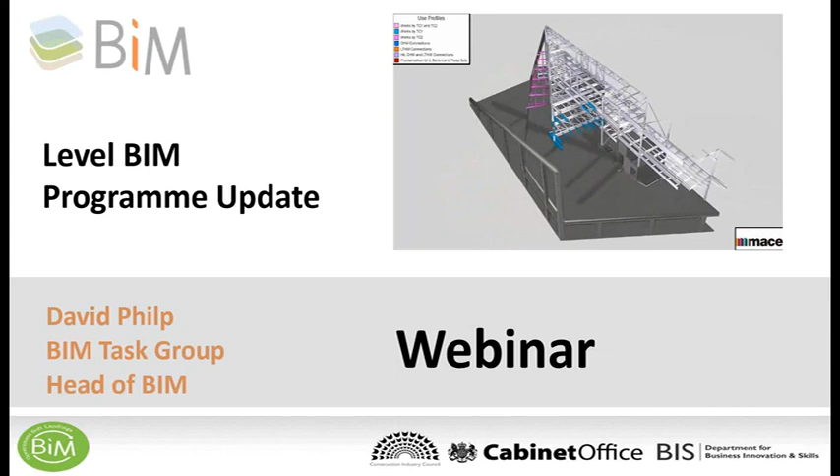So who am I? Well, I'm David Philip. I'm part of the UK BIM Task Group, helping UK government and indeed UK industry get ready for the Level 2 BIM programme.

What we're seeing is building information modelling. This isn't just centric to the UK, it's happening all around the world, maybe through financial stimulus. We're seeing more UK governments and clients thinking about BIM in terms of deliverables, but also how it improves procurement and project delivery methods - different ways of working, bringing together BIM and Lean.

One of the big things in terms of the journey - I generally believe it's not a matter of if, but when your firm is going to implement BIM. The big thing is, are you going fast enough to get ready as we head towards 2016?

When we talk about BIM, I think most people now recognize it as a verb - the act of building and information modeling. We're starting to think more about the virtualization of that asset lifecycle model - how we create the digital database, how we can analyze it, evaluate it, make smart decisions, and understand how that digital environment is going to interact with reality.

So we're starting to think more about outcomes. We're also thinking more, not just as contractor or designer, but as the client or project manager, about digital briefing and digital procurement. What we're seeing more and more is building better before built - taking that waste out through building in a digital sandpit, then thinking about optimized outcomes.

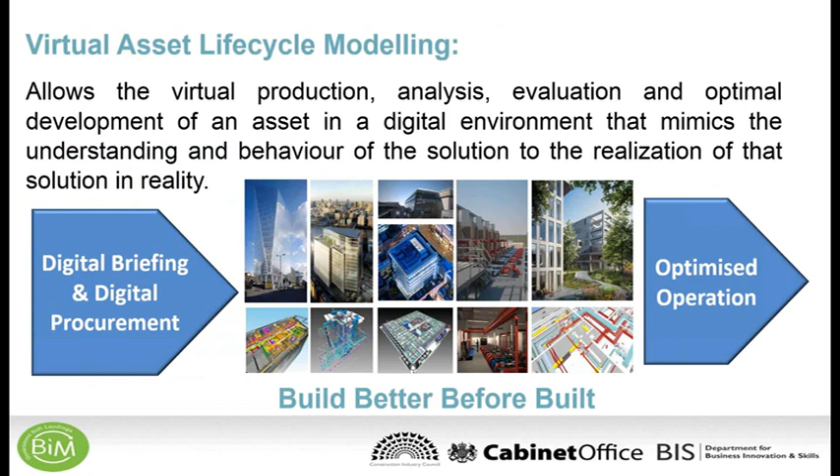Since we started the program back in 2011, BIM has become a bit of a metaphor for industry change - starting to think about how BIM and computational data can inform procurement decisions.

I think that's a really important thing when we think about getting ready - how you can use your digital data sets to make smarter procurement decisions and start thinking about using computer readable data.

So it brings a bit of a Trojan horse, I think, to some degree. It comes in various disguises, but I think it's helping us with a compelling vision of what an industry without waste could look like.

Just jumping back - there's been recent articles as well which I think are quite important. They're starting to show how BIM relates to your journey. It might not be purely within the UK, but you can see some interesting things in terms of country journeys, and one of the big ones for me is Singapore.

It's all about hyper-modernization, I think that's a big part. It's not just about new standards, but how we get better workflows and better efficiencies through BIM-focused ways of working. We're starting to see BIM moving right the way through all the different countries.

I think this is an interesting article as well - it gives a bit of perspective on where we're at in the UK. I think it's always good to benchmark, and this is one of the main Italian economic newspapers a couple of weeks back. They were looking at the value proposition of BIM.

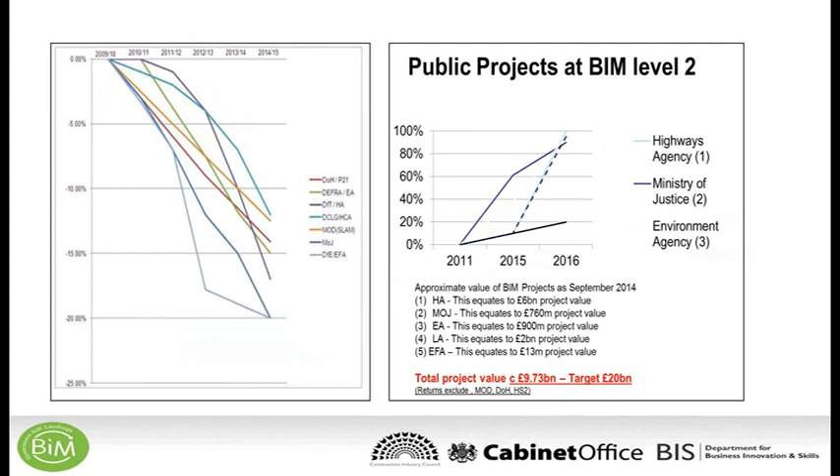On the right-hand side, you can start to see where we are in terms of trajectories for adoption. Now, that was last year. There's probably now over £10 billion going through the public sector, and that excludes High Speed 2, Thames Tideway. If you were to aggregate them all together, there's probably at least 50 billion of Level 2 projects coming through the public purse at this moment in time, which will continue to grow as we get to 2016. So there is a big pipeline coming through that should give you confidence.

As we move to 2016, the BIM task group will continue. It won't be a legacy, but it will be under a delivery organisation, and government departments will have various stewardship groups as well, which are now in place. We're starting to think more and more about linkage to the industrial strategy, and we'll come on to, at the end of the programme, the whole concept of a digital built Britain.

We're also seeing a lot of work now in terms of getting ready for the European BIM journey. This is a BIM for EU working group, and people are starting to think about how we exchange best practice, cultural change, and work together across 28 member states. The BIM task group has been key in setting that up and forming these discussions. We can see countries such as France and Germany already starting to create their own similar BIM task groups as they plan.

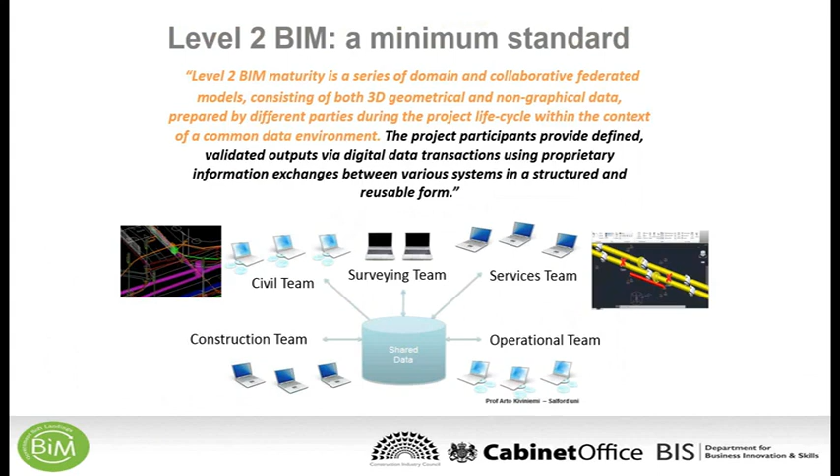So we're thinking about common data environment, and we're starting to think more and more about how we can validate the information and having very clear information requirements as we go through that process.

This is probably the big driver for level 2. It's about clients buying their data once. You can see the sawtooth for the traditional client going for a plan of work, buying their data many times. But you can see the green line that goes above it. We're starting to see through a BIM life cycle, as we go through that plan of work, clients are able to grow data sets to make earlier, more well-informed decisions.

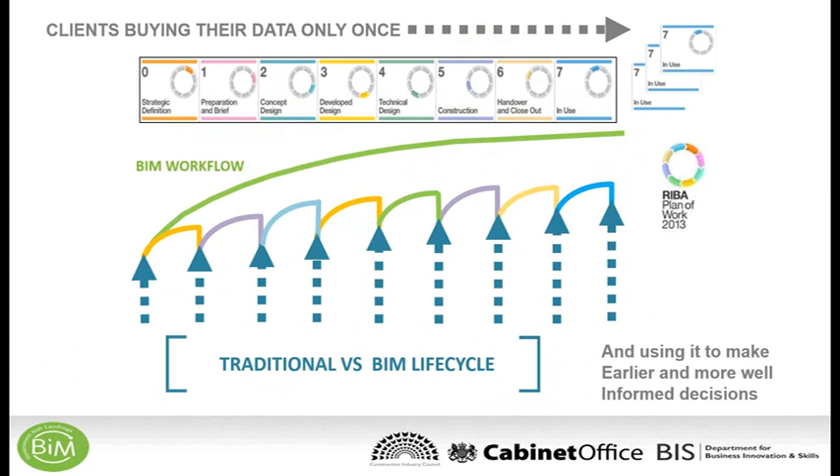But let's start with level 1 BIM, and level 1 BIM for me is made up of two really key components, the foundation. We have our BS 7000, or Design Management Part 4, so Design Management, a key part of level 1 BIM. And then we have a document called BS 1192 2007, which sets a key part.

It puts, if you like, a common data environment together. How we start to think about managing and sharing information in the project, that whole project life cycle that are really so key.

We then come into level 2. Please, lots of people try and jump to level 2, but start to think about getting your foundation in level 1, get a common data environment in place. And then we start to build upon that with our first piece.

So the first main part of the jigsaw is PAS 1192 Part 2. It went out in 2013, and these documents are available free of charge on the UK BIM website. This looks at the information management process during the capital expenditure stages.

So we start to think about how we manage our digital information, moving from that work in progress, making sure we've got some degree of a gateway in terms of approving as it moves to shared, publish and archive. We're starting to think about information flow through what we refer to as that project information model.

It's the key thing. We've got two things: the project information model and the asset information model pre-handover. You can see there the document on the left. It's been downloaded at least 15,000 times from the BSI website since it came out in 2013.

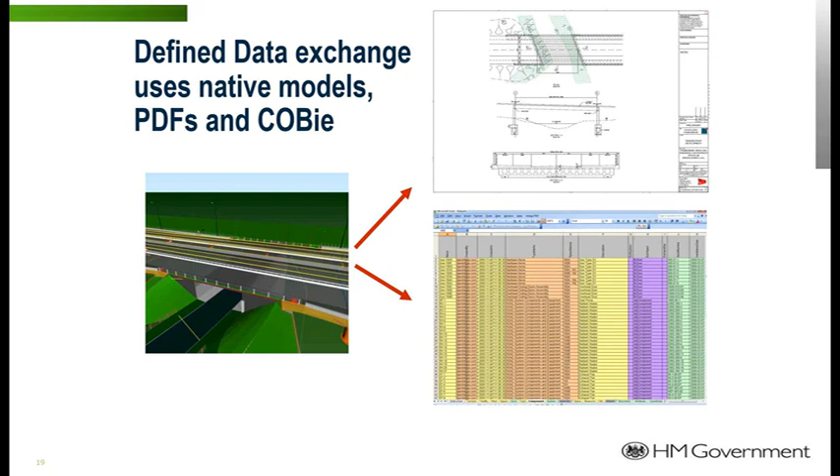We mentioned at Level 2 we're looking to get data in a reusable form. So you can see there how we've taken the data out of the native model into COBie, and we're starting to automate it and map it through into a computer-aided facilities management system. So COBie is a key part of Level 2, and I would urge people to get their head around it.

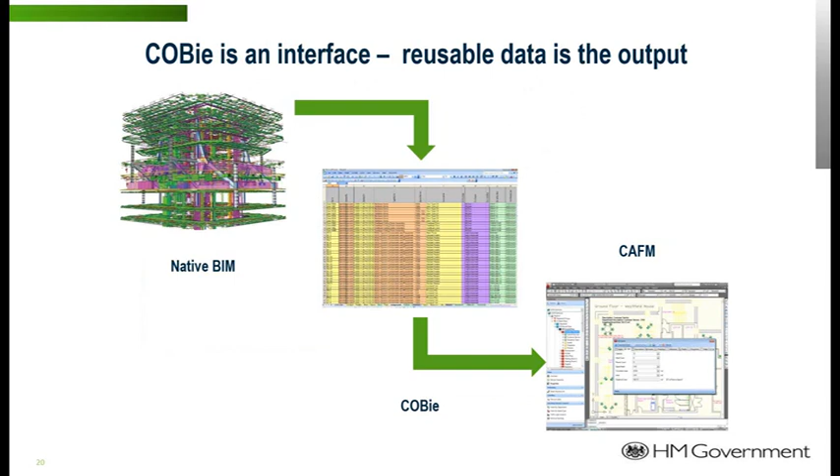Think of it almost as a piece of luggage with transparent sides. You can see where you want to put different things in terms of spaces, systems, and components, and you can take it from one stage or one place to a different one and take information out of it.

As we mentioned, we've got the digital plan of work coming out in April, and this looks to articulate how we describe information, but also how we respond to what we call plain language questions, making sure we've got appropriate levels of information at the appropriate points in time, either for COBie, PDF, or analysis.

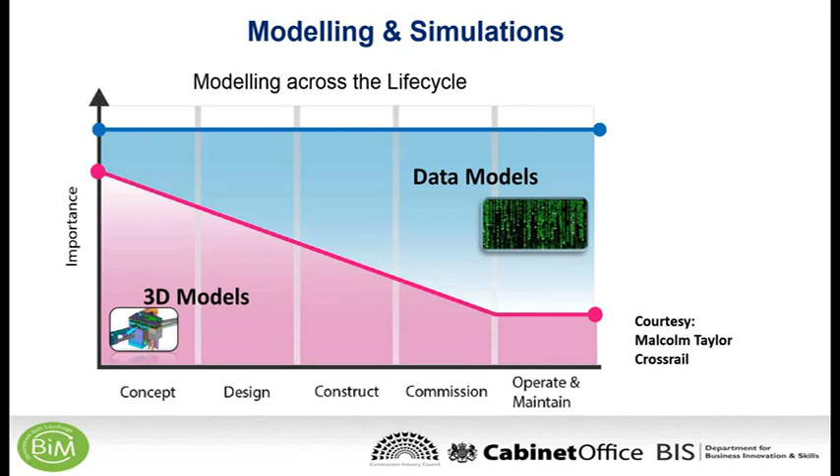As we start to move to O&M, we start to see, if you like, we've switched over, and the non-graphical data is probably more important at that point than the geometrical nature. So start to think about what does that look like for your projects, and how do you make sure that you're describing and understand your plain language questions as you go through each stage of that program.

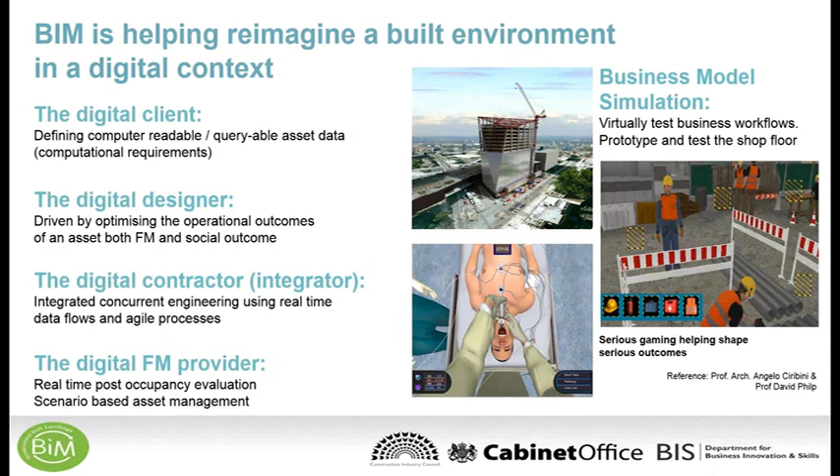We're starting to see on the right-hand side, you can see there, business model simulation. So not just looking at how do we simulate to build, but actually convergence of things such as serious gaming. How do we actually test and prototype what's happening on the shop floor? So I'm thinking about serious gaming and how that helps shape serious outcomes. And BIM should be very much outcome-based in terms of what we're doing. And we always said that level 2 is very much a staging post.

But again, as we said there on the presentation, you start to think about getting ready for level 2. It's taken us 5 years to mobilise, and in June this year, all the component parts will be together. But we're working then to actually try and put them together into that engine and start to drive real efficiency in terms of what we're doing. So level 3 is going to be a complete paradigm shift, moving from collaboration to integration. We've got to think about the time it will take that industry change to happen. It will probably be about 8 to 10 years in terms of mobilisation.

So it's important that we see the vision, the business plan of level 3, but at the same time for industry, it's very important that people can upskill, maybe going from level 1 to level 2, or indeed even just starting the level 1 journey. So this is very much where the priority is at this moment in time. And it's really key that people can start on that journey. But you can start to see the vision, and you can start to see that 2016 itself is just a staging post on the journey in terms of what's next.